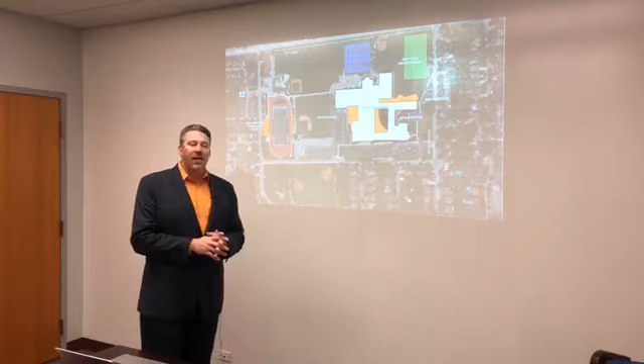So we're going to start with South High. What you see up here is the areas of the external building that will be touched as a result of this plan—areas where we're filling in courtyards, a new auditorium. We're adding on a new addition to the structure, and then we're putting in new bleachers and squad rooms out on the fields.

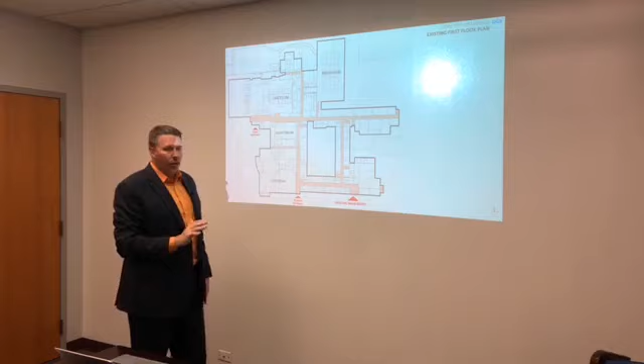This is the current floor plan at South High. This is where the main entrance is, where visitors come, and this is where we have student drop-off. Everywhere that's peach represents a current hallway, and this gives you a feel for how South High is laid out.

South High is very boxy, with a lot of hard edges. It was built in the early 60s when there was a lot of expansion in the suburbs, and buildings like this went up really quick. A lot of public buildings—hospitals, schools, and prisons—were all built with the same design aspects in mind.

We hear that a lot from our kids, that they're not really proud of their space at South High. So we're trying to really make this a space that our kids and our community are proud of.

Here's what the floor plan will look like on the first floor once this is all done. Anywhere that has color on it, we're touching as a result of this plan. You'll see the main entry moves over here, and in another diagram our student entry moves, so they flip. What we add here is a secure vestibule where visitors check in and then come into the dining area.

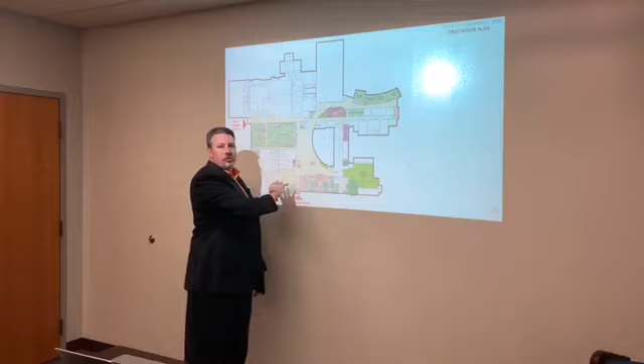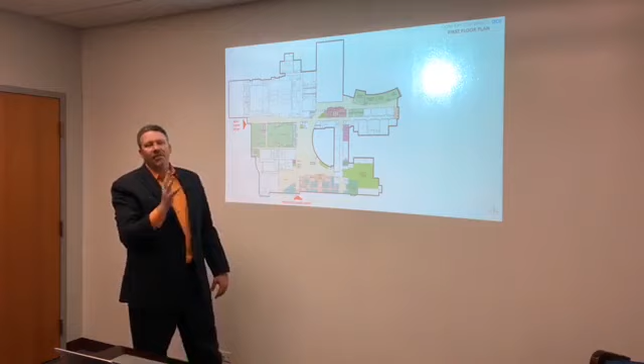This is that Main Street area of the school we talked about. This large learning commons becomes the space where our students are before school, after school, and during lunch periods. From there, they can access all of our administrators, counselors, social workers, and psychologists, which are in the front of the building. They can get to the library, technology support, the dining area, auditorium, the music wing and practice rooms, up to the gym, over into the arts wing—the new arts wing you're going to learn about today—activities, athletics, everything a student might need throughout the day, accessible through those commons.

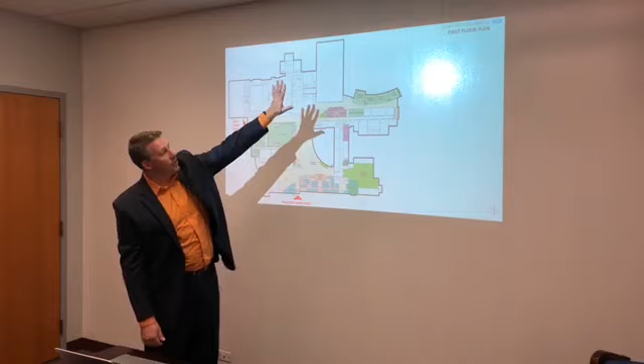What you're going to notice throughout the building is a softening of all those hard lines at South. Outside, there's a refresh of the exterior, including new entranceways and a new turf field in the top corner. The outside facades get refreshed too, so that 1960s turquoise color around the buildings will go away, and the building will look more modern and more visually pleasing. As you come on 63rd Street, we want you to recognize that this is a high school and that our community is proud of the landmark that's here with South High.

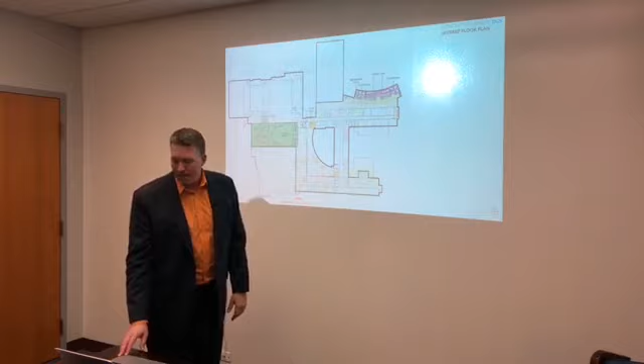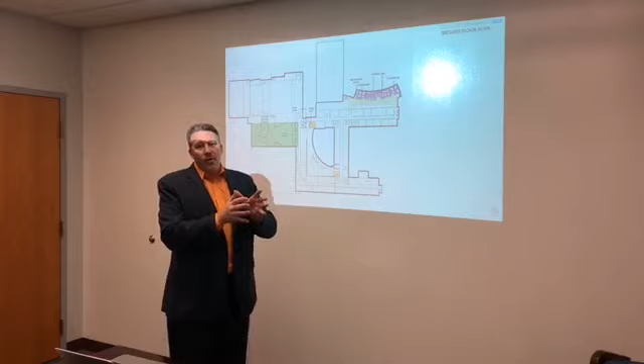As we move up to the second floor, you're going to see auditorium changes, which we'll dive into in a second. But what you're going to see on the second and third floor are these study lofts. One of the things we're trying to add at both schools, as we move into more small group learning and students having more time throughout the day because study halls are held in this space, is giving them a variety of flexible spaces where they can work on their own, in small groups, and in large groups to get their work done. You'll see a couple of those study lofts here, and then the second floor of the new Fine Arts Addition, which has some science space.

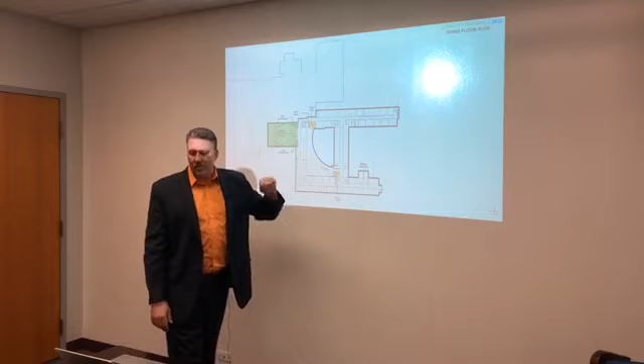I want to focus in here first on the front part of the building that will be changed. As I mentioned, the security vestibule is here, a new main entrance, and then a new student entrance.

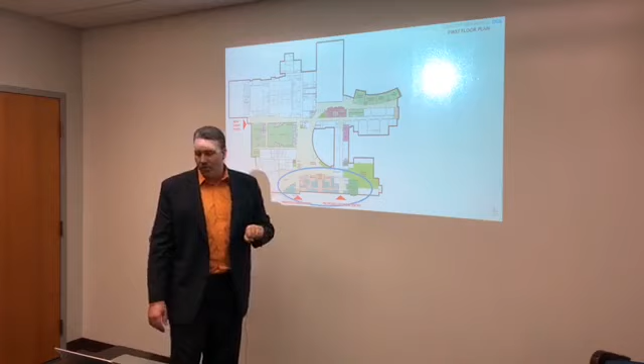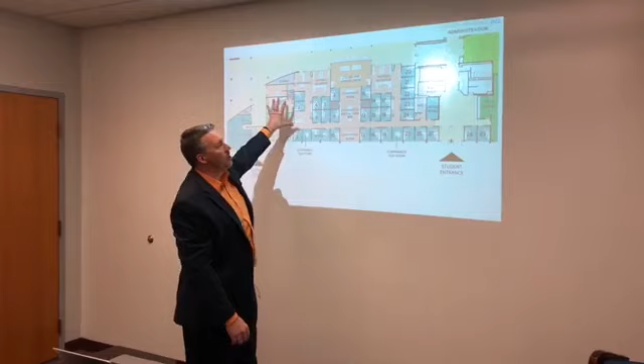Here's that secured vestibule with the security check-in, and now what we do is pull back a whole bunch of different offices that are throughout the school—especially for counselors, psychologists, social workers, those kinds of folks—all get to come into this main front part of the building. So when students are up here in the commons, they can access all the resources they need at any time throughout the day. This makes it really easy for parents coming during the day. We also move our health center to the front.

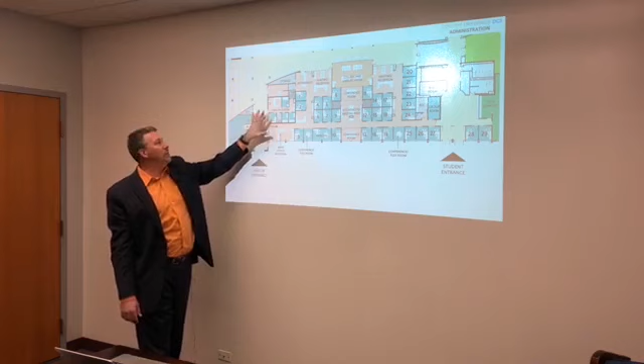A lot of times parents are dropping off medication or doctor's notes or those kinds of things. Security is right here to greet them as they arrive, and once they're checked in, they can get into this office area. Also, if students are sick throughout the day and need to be picked up, we put the health center right by the front door to make that easier. You'll see the student entrance moves over here and lines up now with the hallway so that students enter and are quickly into the building after they get dropped off.

I'm going to move over to this part of the building here where the auditorium is. In the new designs, the current auditorium is torn down, as well as the small auditorium, and a new one that meets our capacity needs is built in its place.

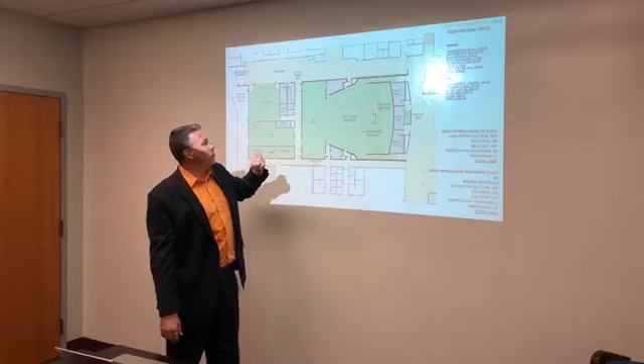This is a zoomed in look at that auditorium. You would enter here from the Commons, which becomes the reception area outside of the auditorium. You would come in at ground level and go down into this front lower seating called orchestra seating, and then up onto the stage. This is all a series of ramps so that students can get around quite easily.

Once you come in and you're here on this main floor, you could turn around and walk up into this seating area, which would end on the second floor.

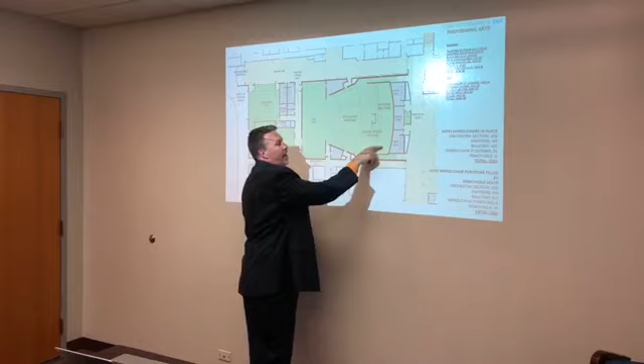You'll notice on the first floor here, we add some things behind the theater, including a scene shop, black box studio theater for smaller performances, dressing rooms, and we're adding an additional classroom here for theater arts.

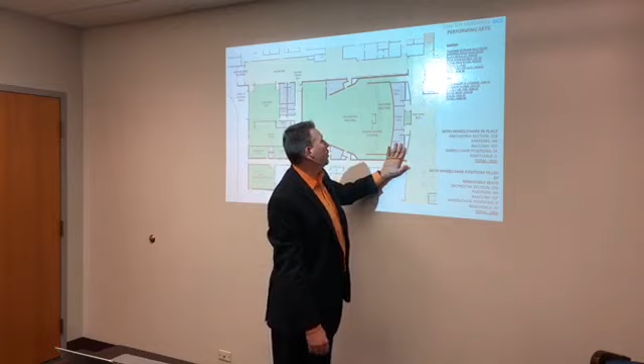Moving back across the auditorium on the first floor, we have some restrooms in the front of the auditorium for both events that happen here and to service the Learning Commons on the other side.

Moving up to the second floor, above some of this backstage area, we have some storage and a control room for this small theater. We also have a control room for the main theater. This is where the seats on the second floor exit out into the hallway.

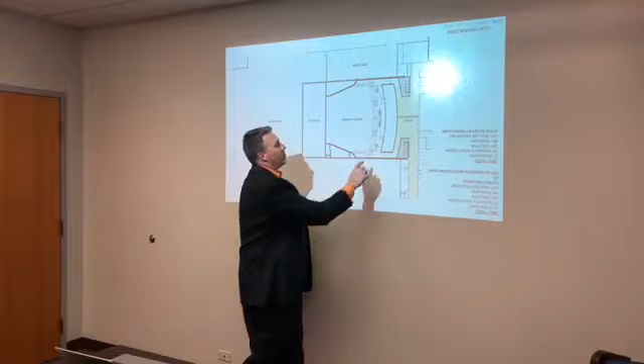Moving up to the third floor, we enter from this hallway with a large waiting area out here at that third floor theater. You'd enter in through this set of doors that would stop any sound from coming from the hallway into the theater space. And then when you enter, there's a lower box area that you could head down and be seated in, or go up the steps into the upper box seating.

All together, that auditorium then seats a little over 1,200 people, which is a comparable space to what we have at North High.

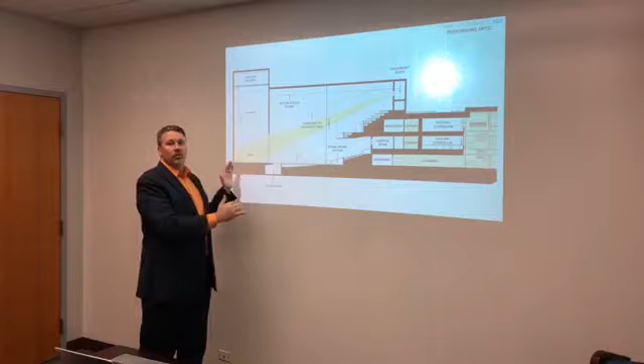Here's a cross-section view of that same space. So orchestra seating, here's our first floor, second floor seating, the lower box, the upper box. You can see the cross-section of the restrooms on each floor with the control room out into the commons and how that fits into the rest of the space. It's a rather large vertical space to fit everything that we need in here.

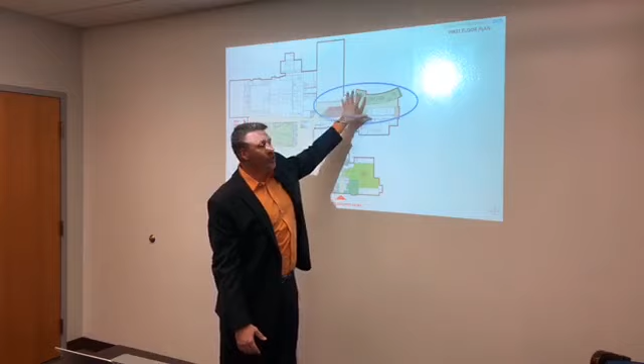Now we're going to move around to the back half of the building into the new addition on the northeast corner of the building. This is the Fieldhouse where it's at now. Main entrance, you kind of walk through the commons and then you head into this fine arts wing. The first thing you hit as you come around that corner is our new Culinary Arts Labs. These are areas in our building that really need to be upgraded and are as a result of this.

We're still working on where the furniture falls in any of these diagrams. Anywhere you see furniture is just for scale purposes only. We've really worked on figuring out where the walls fall, but the furniture inside is still being determined.

As we design each of these spaces and get drawings for them, we'll do short presentations on each, if you're interested.

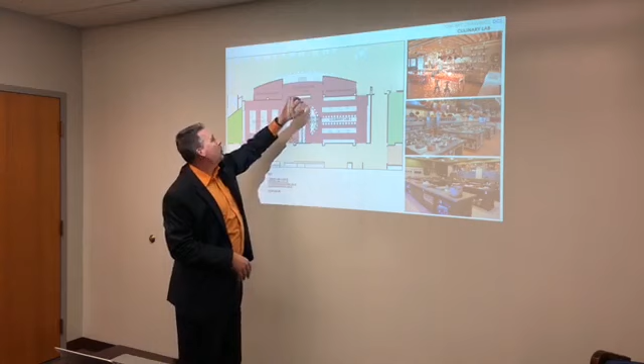Some of the key features here are two Culinary Arts Labs that share a demonstration kitchen with sliding glass partitions and a counter feeding out into the commons area. Before and after school, students can put their learning and work on display, using this as a servery area for those kitchens.

Throughout the presentation you'll see images on the side or scattered throughout, and I'll focus in on a few. These are reference pictures our architects, teams, staff, and students are using to pick out aspects of other spaces they're drawn to, so we can integrate those pieces into our spaces as we build them.

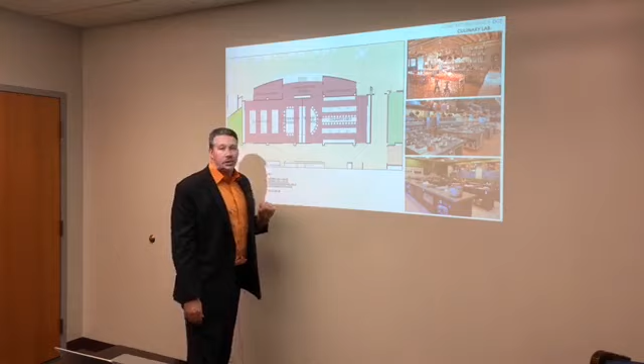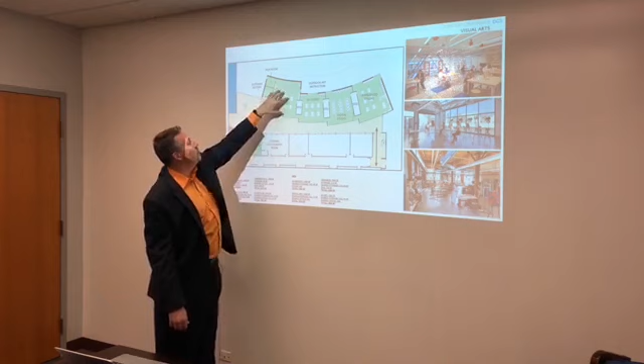As we move around that curve, we end up in the fine arts area. You'll see the edge of the Culinary Arts Lab, then head down into the commons and hit a ceramics studio. Ceramics is a very popular program in the district, and we have both indoor and outdoor ceramic space to support it.

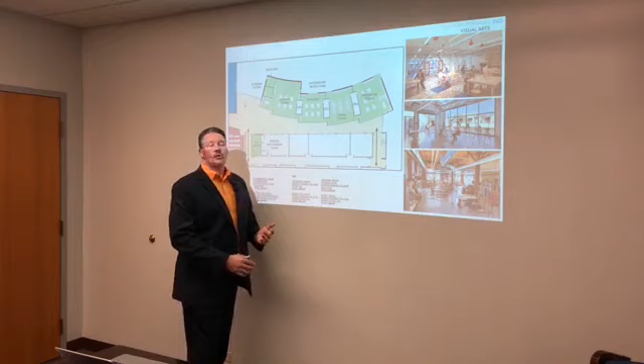Then we have other art programs, like 2D drawing, a digital art lab with computer resources, and another jewelry and 2D studio at the end. We have a very popular jewelry program at both North and South High, so this new wing gives us all of those resources.

The culinary arts and all of these spaces are currently located where the commons will be, so we need to find somewhere else for them in the building. That's what this new space is for.

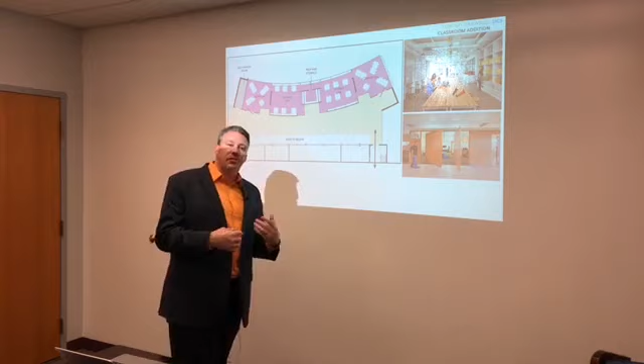Above that on the second floor, we have a couple of science labs. Science labs are really a limiting factor in schools for how we build schedules, so adding more helps us meet students' requests for classes. We're able to add a couple of science labs here at South with classrooms that could be used for a variety of things, plus more flexible space outside those classrooms.

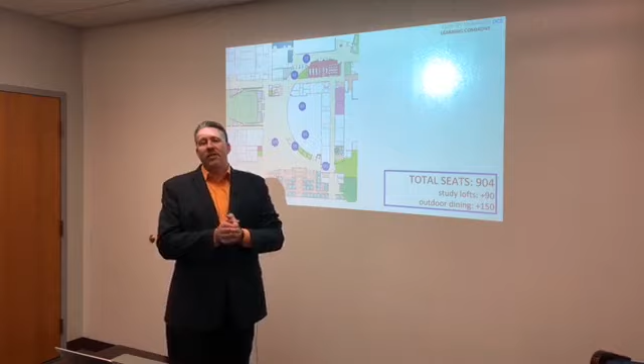This is back to the commons, showing how many seats are available throughout this space. Remember, we have three lunch periods each day. Right now students have lunch for 20 minutes and a study hall for 20 minutes elsewhere in the building. The Learning Commons allows students to take the full 50 minutes, since there doesn't need to be a passing period.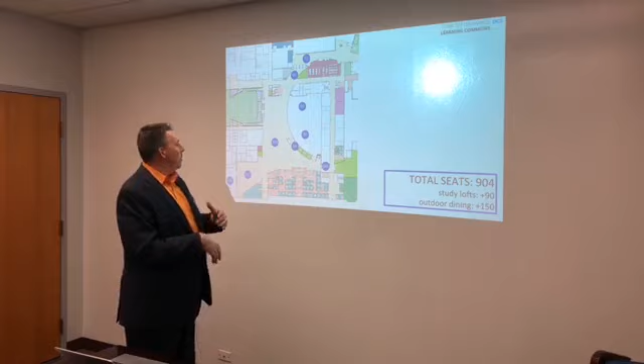Students can find a space in here to work—choosing whether to start their lunch hour in the cafeteria, visiting their counselor, in the library, or going to a practice room for a while. They get to pick and choose how to use that time the way they need each day, which allows us to be more responsive to student needs.

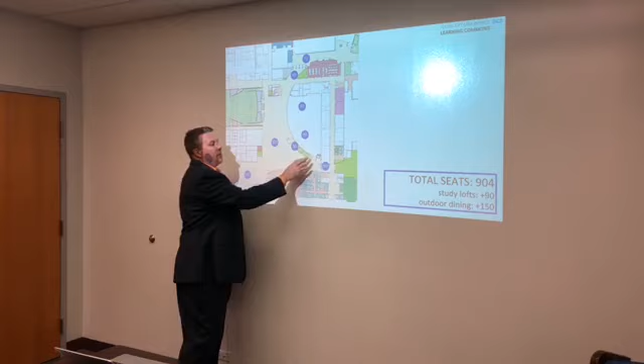In this space you'll see things like small conference rooms, and there's a large stairway leading between the first and second floor. I'm going to show you some ideas of how we're thinking of designing that space as well.

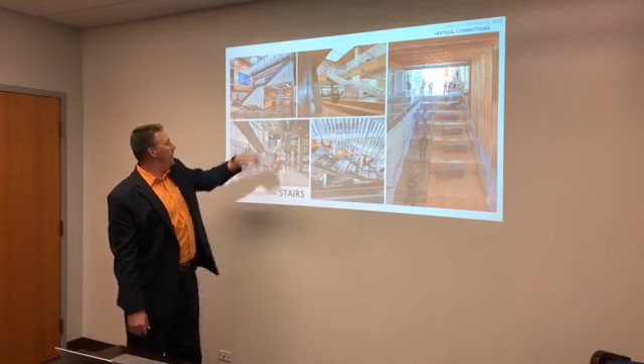Here are some ideas for these collaboration stairs—not just stairways going up, but spots where students can stop and work along the way in small groups, with rooms underneath them, giving us a variety of ways to use the stairs rather than just moving kids between levels.

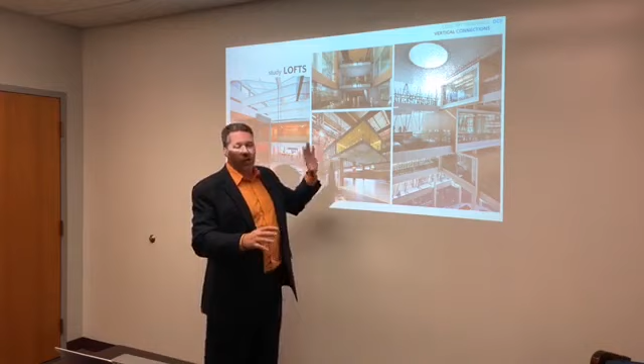At the top of each of those stairs are study lofts. Here are some inspirational images we're drawing from as we design those spaces—areas where you're looking out and others can look in, and you can meet in small or larger groups to get work done.

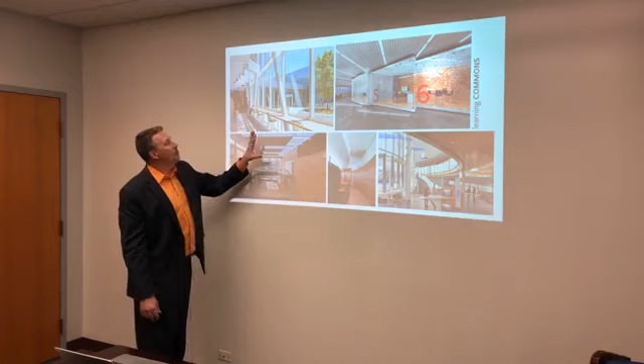Here are some more inspirational images for the Learning Commons. You'll see the idea of curved glass walls with the commons underneath, spaces throughout for small meeting rooms as I mentioned, and a variety of finishes to modernize that space at South High.

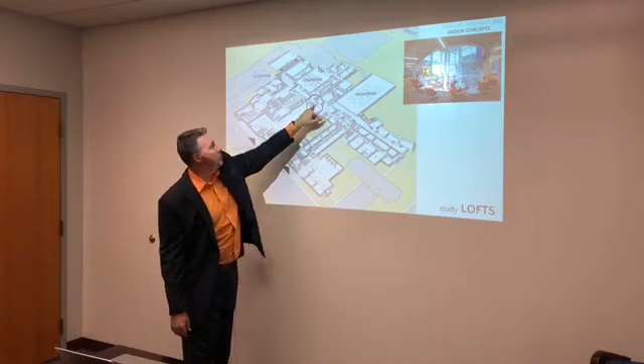Then the study lofts, some more conceptual images of what we might be looking at for these study lofts that are on the second and third floors in the corner of the commons.

And then the idea of accentuating curves at South High, getting rid of those hard corners and creating a more flexible, inviting space as a result.

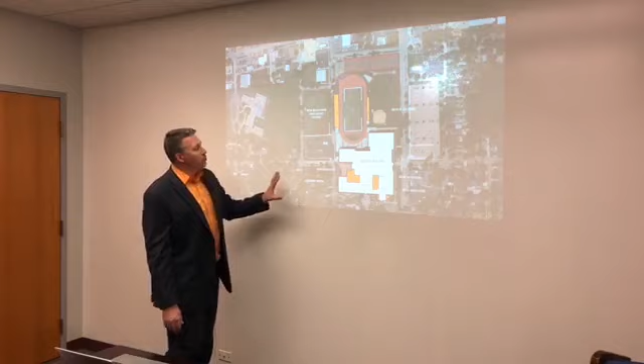Now we're going to move over to North High and look at some of their spaces. Once again, we're going to start with an outside view. Here's the current North High.

North High is really stacked on top of itself. It's a compact, dense building.

You'll see we're taking over a courtyard that's smaller than South High here, and a courtyard in the back that's kind of a loading dock right now and a dining area.

New bleachers here, and a little bit of a new addition on the southeast corner of the building. But this is kind of a sore thumb of the building, it doesn't match the rest of it. So we'll make sure that these finishes match the rest of North High.

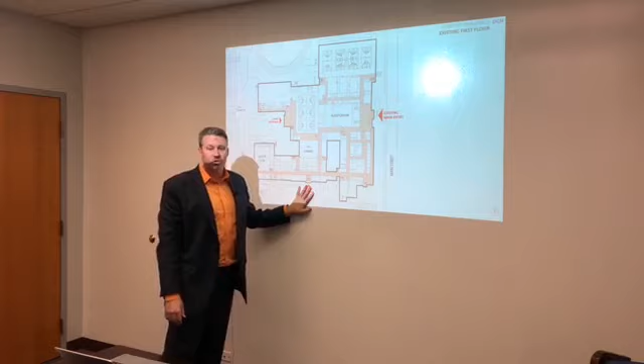Here's Prince Street with the Prince Street event entrance. Here's Forest with the Forest Circle and the original entrance to the building.

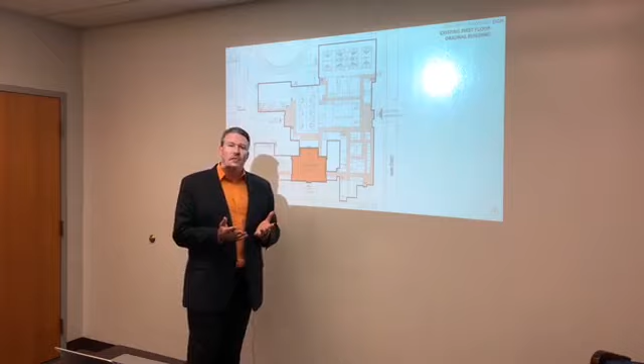One of the things we're trying to really focus on and highlight as a result of these designs is that inside of North High and built around it is the original 1928 Downers Grove High School. As part of the construction and renovation here, we're going to open up and expose those original walls.

To bring that building back to life inside of the current building. This is just to highlight the areas that are being touched as a result. You'll notice that it's really the south half of the building that's really being changed as a result of this.

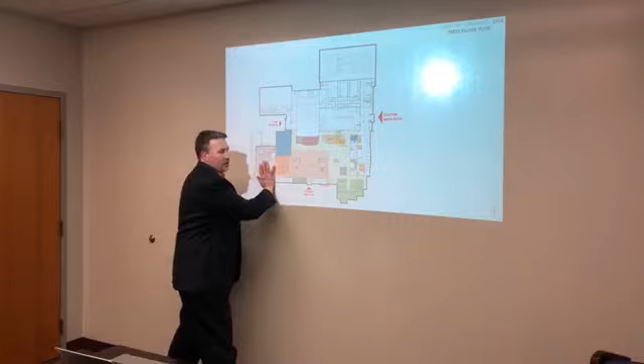These parts of the building were revitalized in the last building plan, so it's time to really focus in on this half. You'll notice the two main entrances that we're going to focus on, and then this part of the building we'll dive into in a second.

Zooming in, just to give you an idea of the changes that will happen. Over here is the current white gym.

This becomes the new building services and loading dock, which moves the loading dock out of the middle of the courtyard where our students are, off to the edge of the building so that truck traffic and delivery traffic is separate from our students. We have a radio TV area, some special education multi-needs improvements, kitchen serving area, new gymnasium that I mentioned.

Then we move into the revitalized dining area and learning commons. The Culinary Arts Lab is up here to revitalize that and bring it up to modern standards.

Then College and Career Center, Student Activities Bookstore. You'll see the health office gets moved from this side of the building here, very similar to South High.

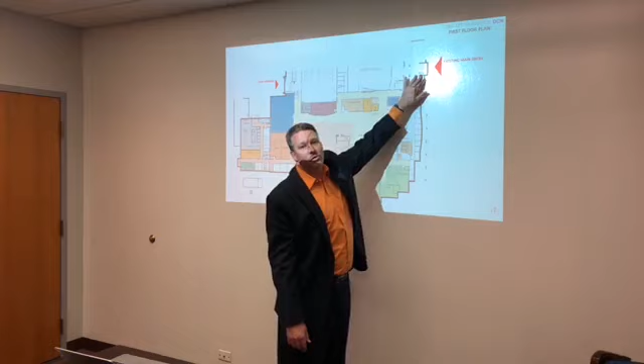We're trying to get our nurse's office close to that main entrance so that parents that are dropping things off can get there quickly, and students that aren't feeling well can easily be picked up and taken home.

We have some light remodeling here in the counseling center, just to make sure that we can pull all of our psychologists, social workers, and counselors into this area.

Just as at South, the idea is that you can get to those resources easily from the Learning Commons, get into these waiting areas, and then get into the offices to see who you need to very quickly and easily.

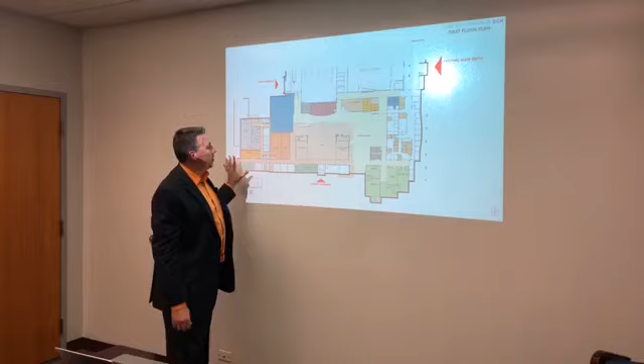Then down in the southeast corner is all being remodeled in here, and we're going to really focus on that in a little bit. So that's kind of the feel of what's happening across the first floor. As we move up to the second floor, we have some classroom additions and remodeling.

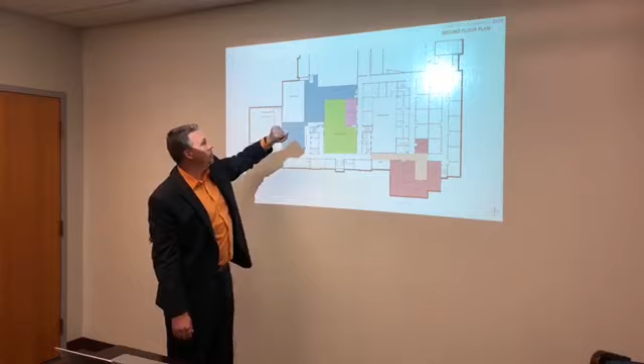Above the kitchen and serving area, we have an athletic loft that can be used for a variety of purposes in athletics, open down below to that gym, so this is a high volume space. And then we have the athletic loft here. This is really a gymnastics loft.

Right now in the white gym currently, we have all of our gymnastics program, and that's going to be relocated into a combination of remodeled older space and brand new space to make sure that we're meeting those programmatic needs.

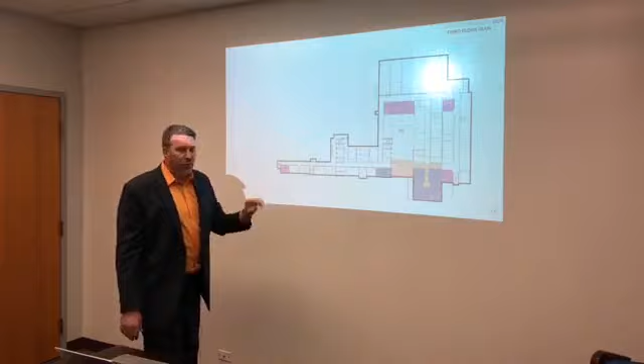Both schools, we're going to refresh the library, Learning Resource Center, a couple of classroom spaces here, and then you'll see this southeast corner again. All 3 stories of this southeast corner will be remodeled as a result of this. So as we go up to the 3rd floor, that remodeling continues up in that corner.

And then a variety of classroom spaces get revitalized, ones that are currently serving as study halls that can become actual classrooms as study hall moves into the commons, and some other older spaces that need to be refreshed.

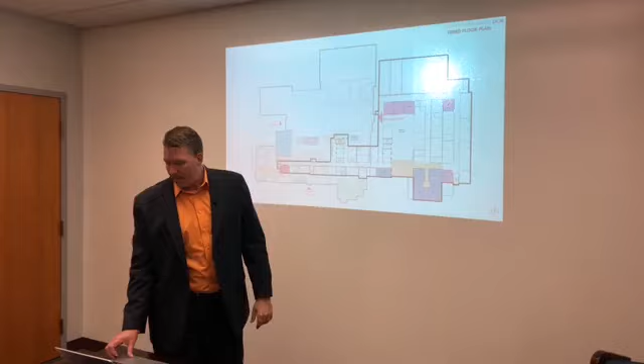So once again, back here on the main floor, we're going to start over here in this corner. What you're taking a look at here is what is the current white gym becoming building services with this loading dock that comes in near Prince Street.

Right now, as I mentioned before, the truck traffic comes through here, through this courtyard. We're going to keep it off on the edge of the building with some brick facing to separate the building and the loading dock from our neighbors, along with a good deal of landscaping to revitalize this corner of the building. Then the Prince Street circle here, the courtyard becomes a courtyard just by itself with no traffic in it.

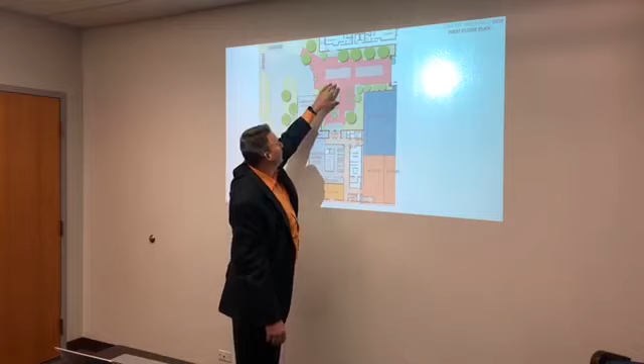The original 1938 gym entrance becomes the gym entrance once again for the new gymnasium that sits in this corner of the building. You'll see some other things that get enhanced as a result of this.

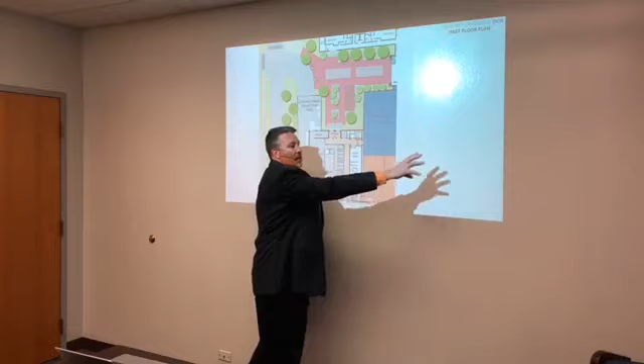The kitchen now sits right next to the receiving area. That's not how it currently works. The kitchen sits down the hall from the receiving area, and any deliveries have to be brought down the hall, and any trash needs to be rolled down the hall. This allows us to get everything in and out of the kitchen through the back door.

This is the serving area, which we'll focus in on a little bit, but you'll also notice in this space we're adding a brand new radio and TV studio.

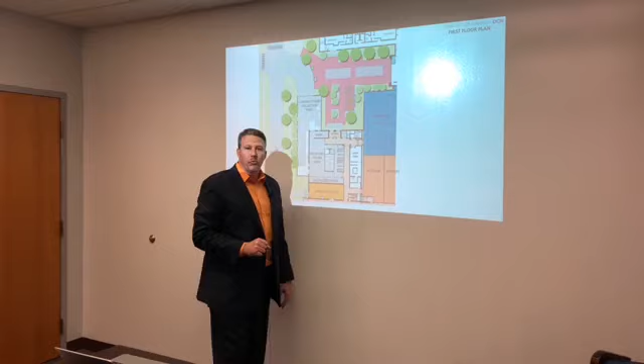This is currently across the hall over here. We're going to move it over here to modernize that space, but we need this space here to become our multi-needs life skills area. Students that have bathrooming needs or are in wheelchairs or need a higher degree of care throughout the day, we're going to make sure we have the appropriate space for our students there.

As we move across the building now, this is that gym, this is the serving area, and now you're into the learning commons and cafeteria. So students would come over here and serve.

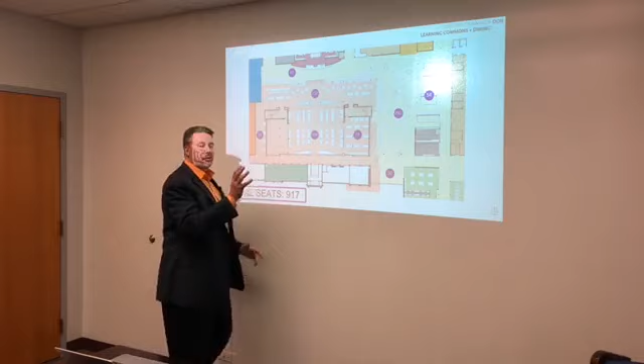I'll dive into this area in a little bit, but here's the serving area for the food, and then they could choose anywhere in this space to go sit down, eat, or work. The idea now is that they have that full class period to be in this space, and from this space, they'll be able to access all of the resources they need.

They'd be able to go up this set of stairs into the library while they're here, these two sets of stairs. Athletics is this direction, activities, college and career center, counseling, administration, dean, social workers. Everything hangs off of this learning commons and common space.

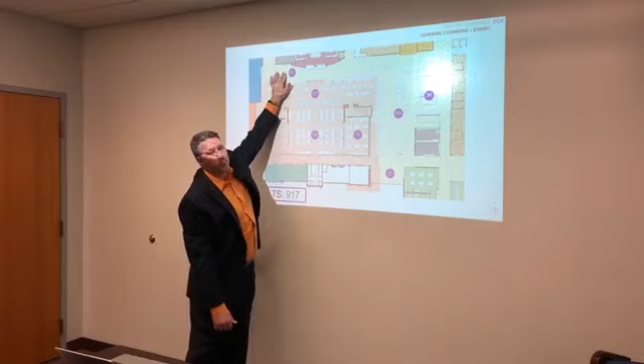One of the things that we definitely have to control for here at North High is there's actually 3 elevation changes just in this small space. This space here is 5 inches higher than this space, and this space is about 2.5 feet higher than this space, just how it was constructed over the years.

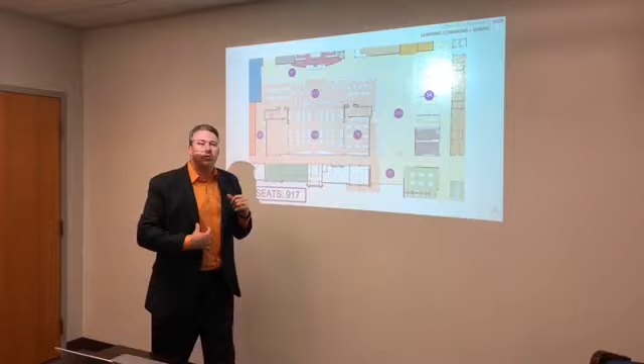What we have now is a series of ramps and slow level changes between these spaces that will allow our students who are in wheelchairs, or our visitors who are in wheelchairs, to easily move up through the ramps and traverse through this space without the need of assistance like we have now, where students actually have to board lifts to get between those spaces.

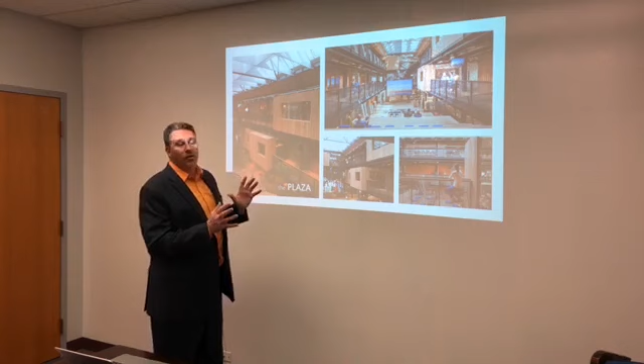Here's some of those inspirational models that we're drawing from as we try to design these spaces. You'll see a variety of finishes, some more modern finishes with some classic finishes inside of North High.

It's the idea that we have this big plaza in the center of the school, and from there students can access all the resources that they need.

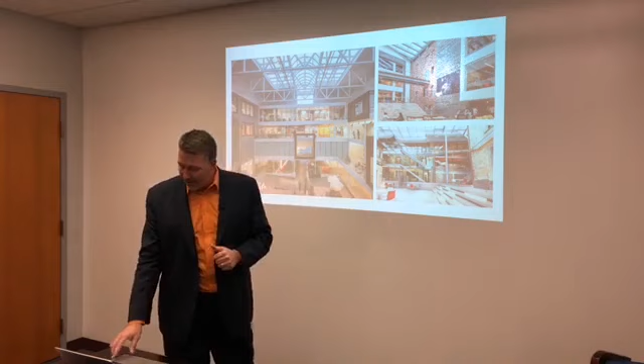Some more ideas that we're drawing from.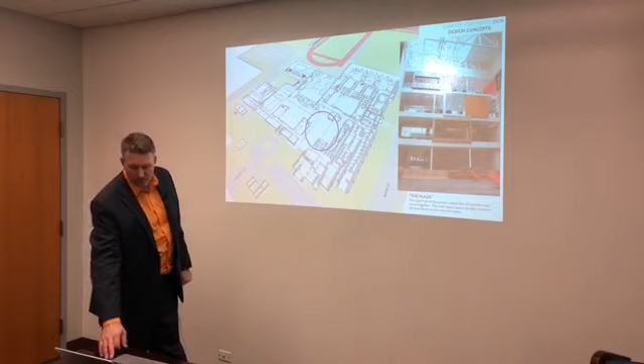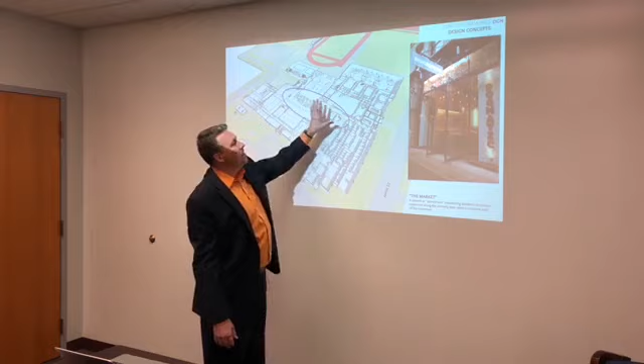Then as we look in the back half of that commons, here we have the College and Career Center, student activities, the Culinary Arts, and we're looking at ideas like this where we can take rooms and open them up to the commons where students can freely flow in and out of those spaces undeterred. Just invite them into those spaces that currently you need passes and need to be invited into. We just want them to go in when they need those resources.

Culinary Arts Lab here at North High, very similar to South in the idea of a lab space and a demonstration space, with plenty of storage and workstations for them to work on the culinary arts.

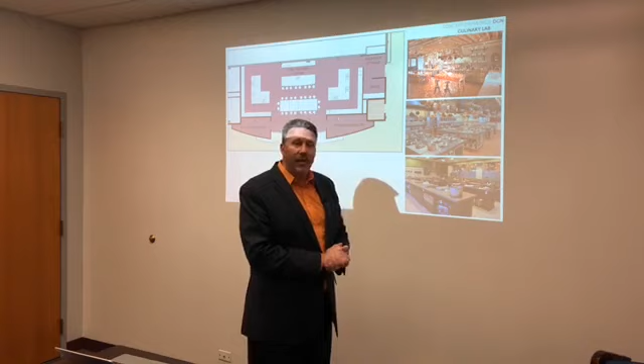Also, throughout our buildings, we're replacing several elevators to make sure that students can get between all of our floors. At North High, this is a problem - we have at least one floor that students can't get to by elevator. So we're making sure that our elevators are easy to use and get students, or visitors, everywhere that they need to go.

I want to focus in, here's some ideas of market space. This would be inspirational images for where that Culinary Arts Lab looks out onto the commons, the idea of movable windows or windows that fold up so that that kitchen area feeds out onto the commons.

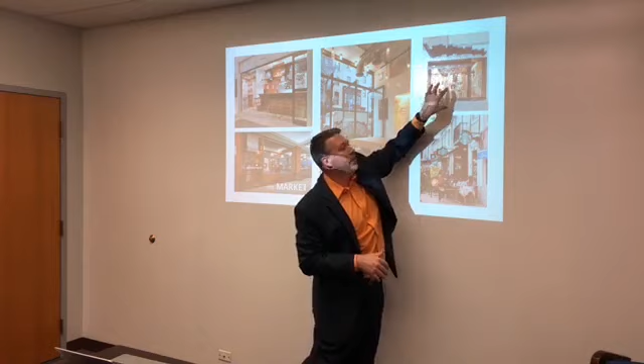And now I want to go around the commons here, back to this market area. This is the market area, the serving area, the new serving area, separated from the 1928 structure. And then this hallway is almost like an alley.

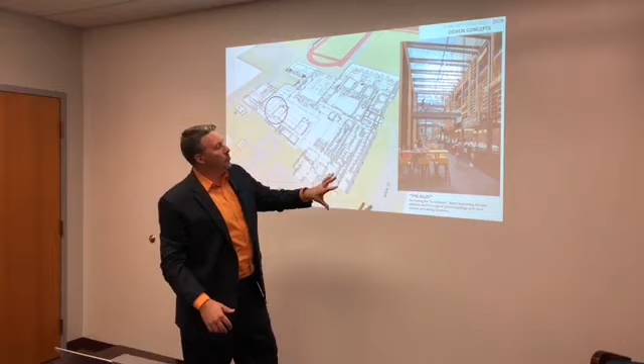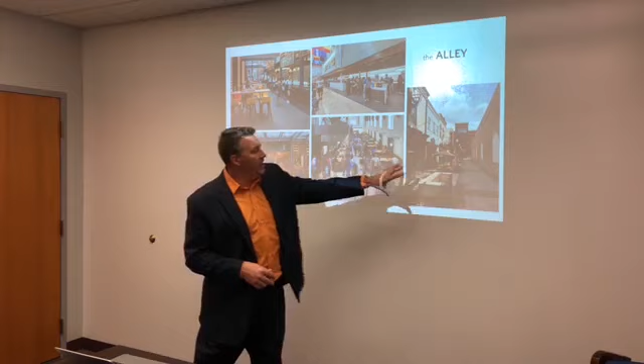You can think of this space - this is an image of what that space might look like, where students would have some quick serving item options, some seating options in that space. You can see some more inspirational ideas here, just like downtown Downers Grove, where we've started doing this in some spaces between buildings, where you get some seating area, walking area, and serving area.

So once students are in this space, they'll be able to quickly get their food and then head out into that common space. Zooming back out, so we've talked about, here's where that alley was and the commons.

Now we're going to dive into this corner of the building down here. So this 3-story 1955 addition will be remodeled both inside and outside. This is kind of the sore thumb of North High. It's got some brick that's not in great shape, nor does it look good, so we need to do some stuff inside and outside.

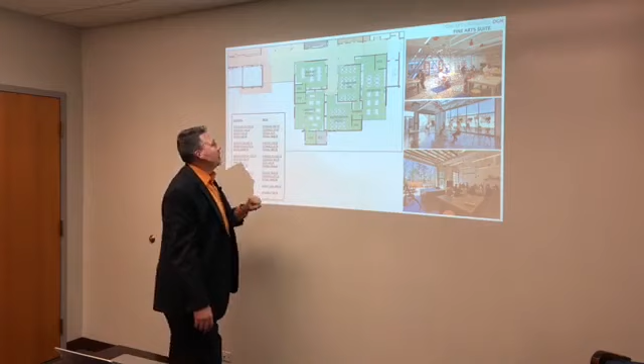The first floor becomes the fine arts studio area. You'll see, just like South High, we have similar programming - jewelry, ceramics, some photography, computer lab, 2D studio space, a kiln, and then we'd have an outdoor space here for fine arts.

More of those inspirational images driving our design. This kind of fine arts commons area feeds right into the main commons over here.

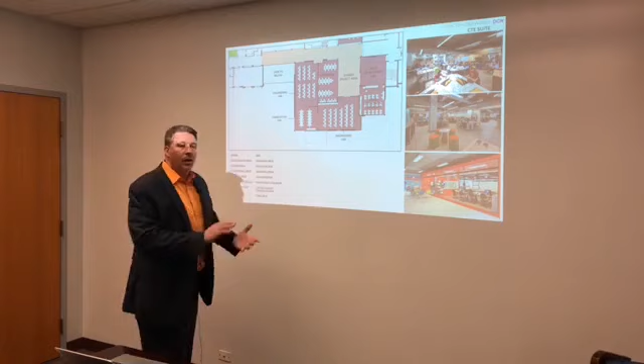We're going to go up to the second floor. This is our Career Technical Ed, CTE suite. And you'll see some classroom space, engineering and fabrication space. We have a strong preschool program, child development, so you'll see an actual classroom space that can be used all day, and then the preschool area that's just used when we have the littles here with us.

Then as we move up to the third floor, you'll see this becomes a remodeled science wing with 4 science labs. One is brand new - we gain 1 science lab as a result of this - and several remodeled modern science labs. Once again, science labs drive our schedule, so the more flexible we can be in science, the more likely it is that students will get the courses in their schedule that they request.

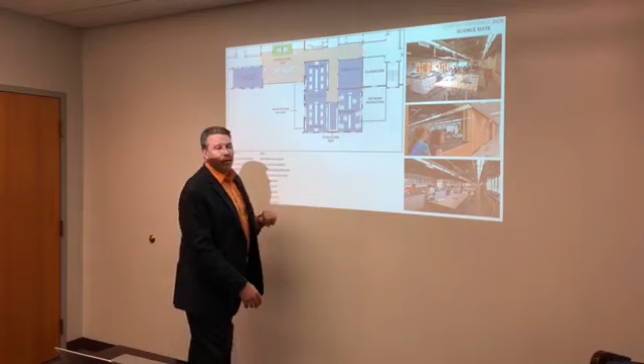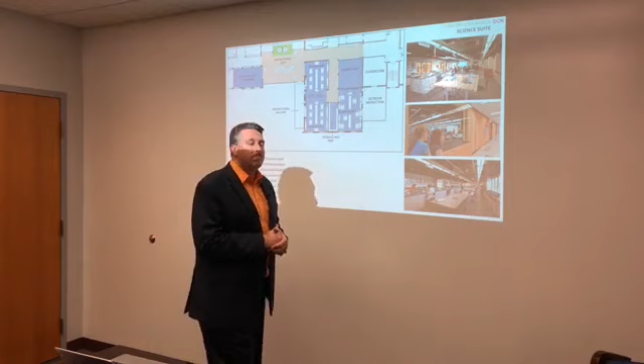You'll see some outdoor instruction area that happens up on the 3rd floor. One of the things we're really hurting for at North High is outdoor learning space. It's a 22-acre campus; we'd prefer about 80 acres for a modern high school. So we're trying to get creative in where we can access space at North High.

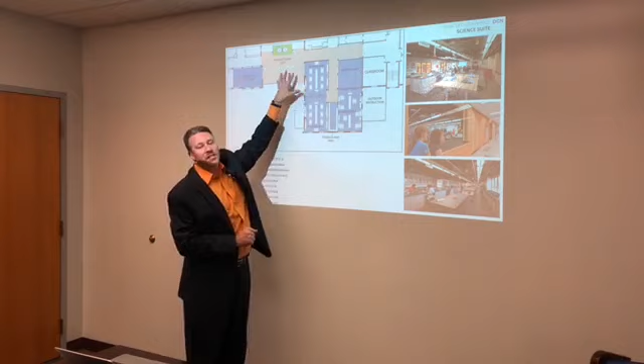You'll see some instructional spots out in some larger hallways. This loft looks down on the commons with a couple of small meeting rooms. The idea is that you could do small group work, or pull out activities into this space. If you were running carts or building towers or those kinds of things, you could get out in some space and do that.

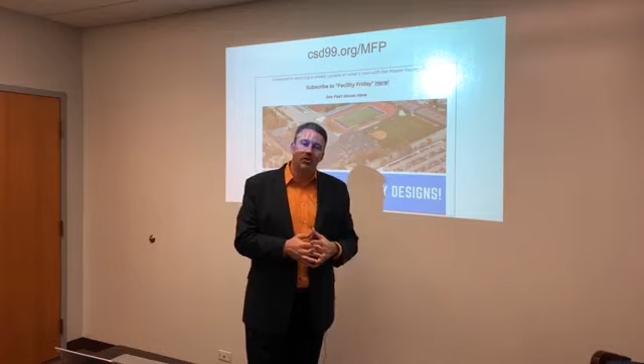All right, so that's the general overview of where the walls will fall. Over the next year, we'll be diving into what the spaces inside those walls actually look like, and we'll be sharing those as they get designed and come online.

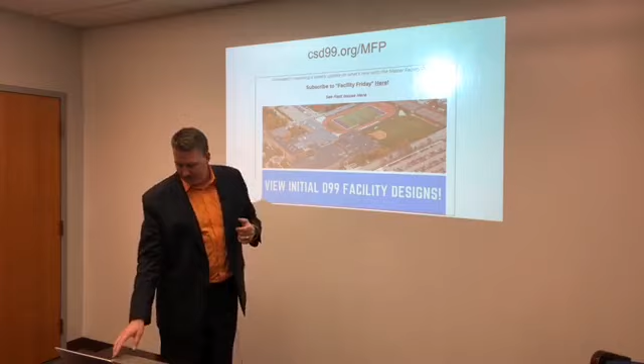Timelines for you is what I'm going to end with. Last night we had the community open house where we went through these same slides and presentation. Today you're here tuning into this, whether live or later on. In the fall we'll move into planning and zoning with the village. After the new year, we'll get out to bidding and have a staggered bid release process over the next year, depending on where the projects fall—next summer or the years after. Building will commence in the spring of 2019 and continue through the fall of 2021, when all the projects will be done.